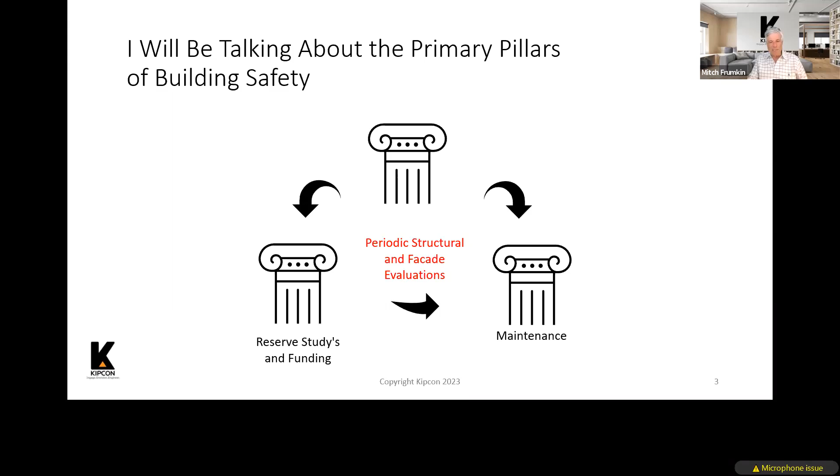But let me first give a little background. What is a building structure? Very simply, a building structure is what holds up the building. It's made up of the foundation, the columns, the beams—essentially what holds up the building.

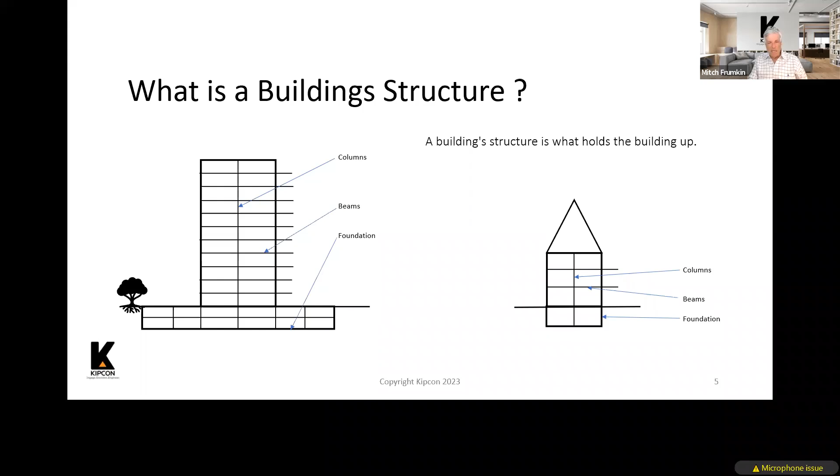Now, the next slide references the building's primary load-bearing system, with an asterisk next to it. I'm putting that there because these are the words used in the legislation, which I'll show you in a few minutes, to define what the inspections are done of.

It's the assemblage of structural components within a building that, by contiguous interconnection, form a path by which external and internal forces applied to the building are delivered to the foundation.

To put that more in layman's terms, since I think we have a number of attorneys here, and this is for legal CEUs—I think you can see my pointer on the screen, I've got a couple arrows here.

There's the weight of the building at the top, vertically—the dead and live load, which is the weight of the building. The live load, per code definitions, is the weight of the people, furniture, and similar things inside the building. Another live load they may consider is snow on the roof—like right now, it's snowing outside my window in New Jersey. So these are vertical loads on the building. There are others, but these are the primary ones.

Horizontal loads are generally wind loads. For example, a wind load may be 100 miles an hour, which equates to 30 pounds per square foot. I don't want to go into too much engineering, but there are horizontal loads such as wind and seismic, which is earthquake.

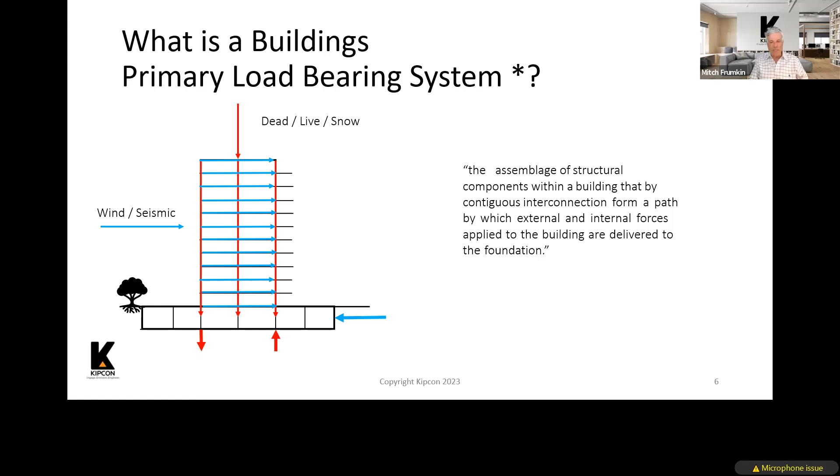So what you've got is the beams and columns—the beams shown in blue, the columns shown in red—and the primary load-bearing system is what takes these forces and delivers them to the foundation at the bottom. I wanted to show you this because when we get into the legislation, this is the definition of what is inspected as part of the inspections.

So what is the building's facade? There's a number of slides I've added here because we're talking about facades also. A facade is the exterior sides of the building, the exterior walls and the things attached to it. You'll see in a minute why we're starting to talk about this more and more, because things like balconies are part of the facade.

They're called appurtenances, and I'll show you what happened in New Jersey with a balcony just a few weeks ago. What we're talking about is an evolution—we started, and I'll show you how things are changing. I think we're getting pretty much to the end of what should be included and how it should be presented. But that's why I've included a facade.

The purpose of the facade, other than to look good, is to prevent air or water from entering the interior spaces. So the facade keeps you dry and keeps the wind from blowing in, hopefully.

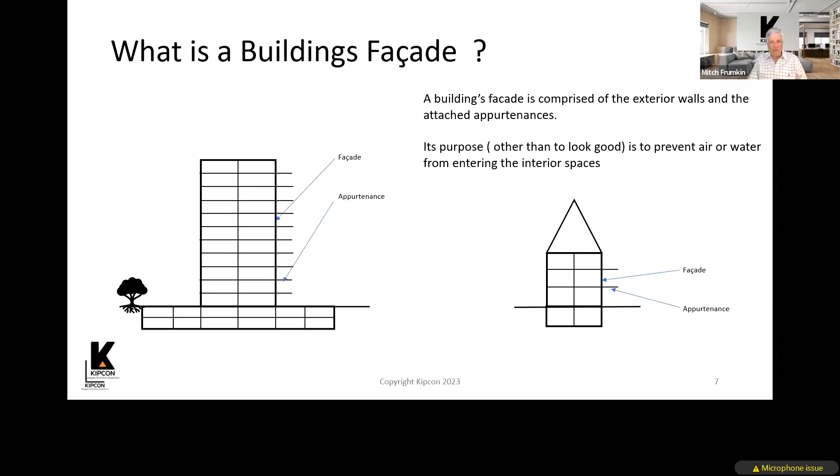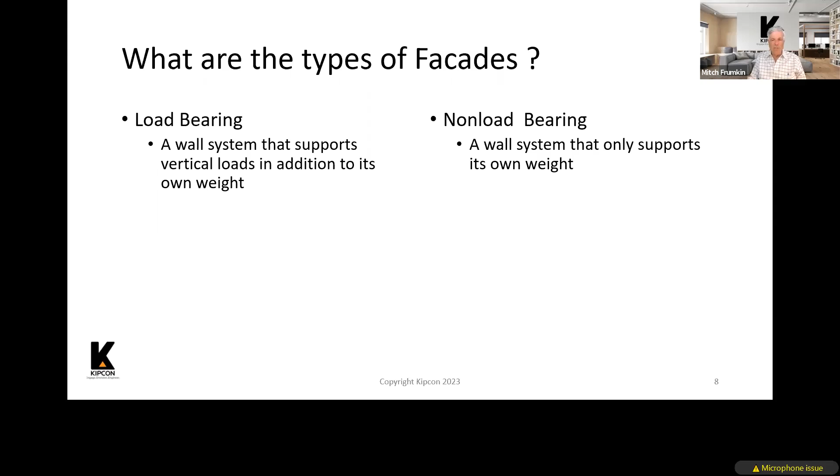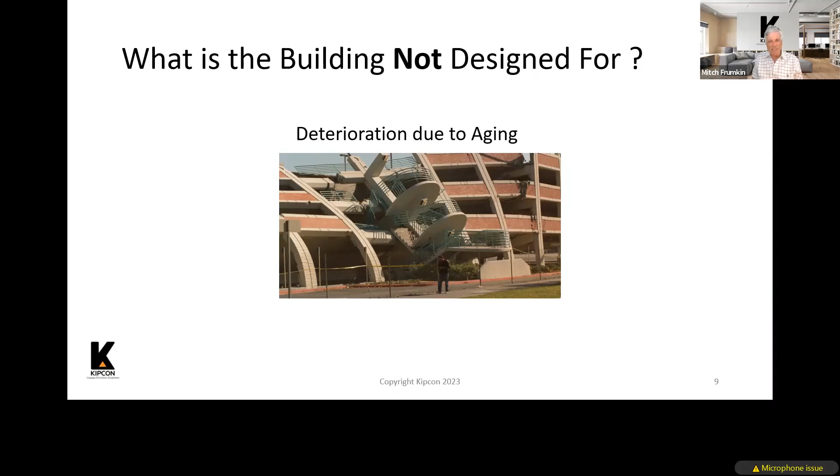So what is the building not designed for? It's deterioration due to aging. As buildings get older, they deteriorate. What we're talking about in all these things is not based on a building being built wrong—it's based on a building aging and us not taking care of it, which creates problems. So what is it not designed for? A couple of things have gotten us to where we are, which you're all aware of.

The Surfside tragedy in Florida, in which the building collapsed. That's the building, I don't have to go into detail, you all know about it I'm sure. But although this has been a terrible tragedy, one of the good things that comes out of tragedy sometimes, and this is one of those cases, is that there's a lot of things going on across the country to make sure this type of thing doesn't happen again, such as the legislation in New Jersey.

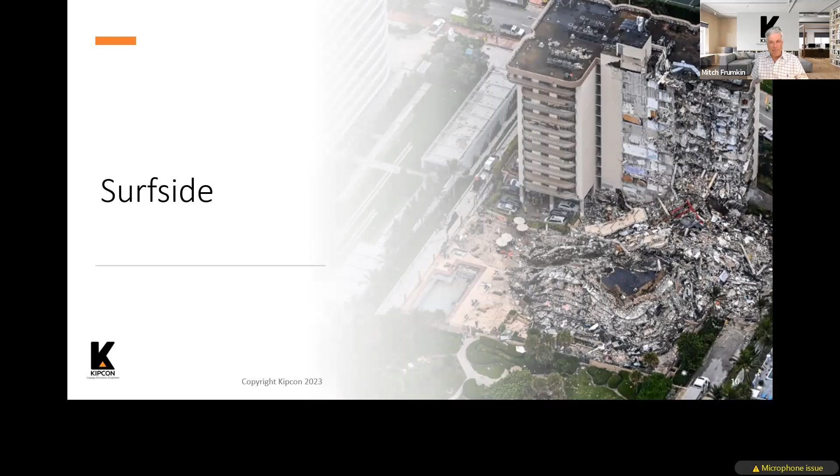So another critical thing is why facades are becoming even more of a focus than they were before. So now, as a result of the tragedy of the Champlain Towers in Surfside, CAI came out with a public policy report on condominium safety.

I was one of the co-chairs in developing this. Ed was on the National Task Force to develop this public policy. And in this public policy report, which if anybody wants a copy I can send it to you, or it's at the CAI National's website where you can download it for nothing, it deals with reserve studies and funding, critical thing, maintenance and structural integrity.

Keep in mind that I've added a note at the bottom here which says not facades - they're not included in the public policy. This was based primarily on a structural collapse of Surfside. But I can promise you on a national basis, CAI right now is investigating modifications to this public policy to start adding additional things such as the facade. We could also touch on, and maybe Ed will mention it, that just recently there's been made some suggestions to the pending legislation in New Jersey so that we do include balconies.

So just a couple other things, what others do. For example, in Ontario, Canada, and Singapore, they have very specific guidelines in terms of structural integrity and safety inspections of buildings. These have been in place for a number of years. Singapore's is very, very detailed, so is Ontario's.

A little note that the requirement in Ontario, Canada for doing structural inspections is based on a collapse that took place, I think it was about 20 years ago. And because of that, they have legislation for structural integrity inspections similar to the direction we're going in. Singapore has been in place for a number of years also.

We also had the opportunity to look at other places around the world. It's kind of interesting to note, which I always do, that there are other countries around the world that have structural integrity inspection requirements. But the United States, other than the 2 counties in Florida where we had the collapse, do not have any structural integrity inspection requirements. And I think we'd all agree that the one in Florida was a little inadequate based on when the first inspection was to take place.

In regards to facades, there are about 13, 14, 15 cities around the country that have facade requirements where facades need to be inspected on a regular basis. These are some of the cities you'll see as part of the presentation, that in New Jersey, Cliffside Park and Jersey City have added facade inspection regulations in the last year, at the most. I think Cliffside Park may have been in the last couple of months.

But I always make the joke, which I guess is not really a joke, that there's facade inspection requirements across the country to make sure that people walking by buildings don't have anything fall on them to kill them. But we don't have any requirements across the country until now to do structural inspections to make sure buildings people live in don't collapse. But there are a lot of facade inspection requirements across the country.

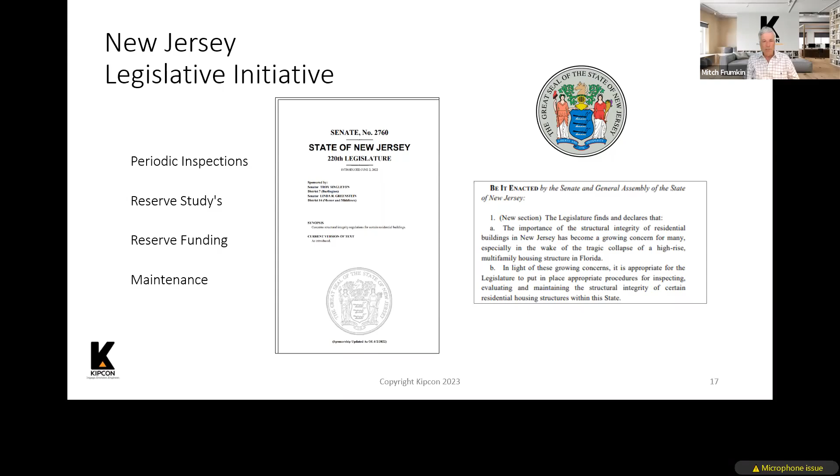So let's get back to the presentation. As Ed mentioned, the New Jersey legislation that's pending includes periodic inspections, reserve studies, reserve funding, and maintenance. It says the importance of structural integrity of residential buildings in New Jersey has become a growing concern for many, especially in the wake of the tragic collapse of a high-rise multifamily housing structure in Florida. That's the basis for where we're going and what's going on.

So the first thing is, what is a covered building? What buildings are included in this legislation? These words, where I have parentheses, come directly from the legislation. A covered building means a residential building categorized as use group R1 or R2, essentially multifamily residential, having load-bearing concrete, masonry, steel, hybrid structure, including but not limited to heavy timber, and a building with podium decks. The thing to take away is that covered buildings are not based on height—it's based on the materials the building is made out of.

A number of times you read articles about what happened in Florida, and it talks about high-rise buildings, so people categorize them as high-rise, but that's not the case. If you look at all the standards I mentioned, they talk about deterioration of structures based on the type of material, not the height of the building, which we'll get into when I show you some other legislation from other towns.

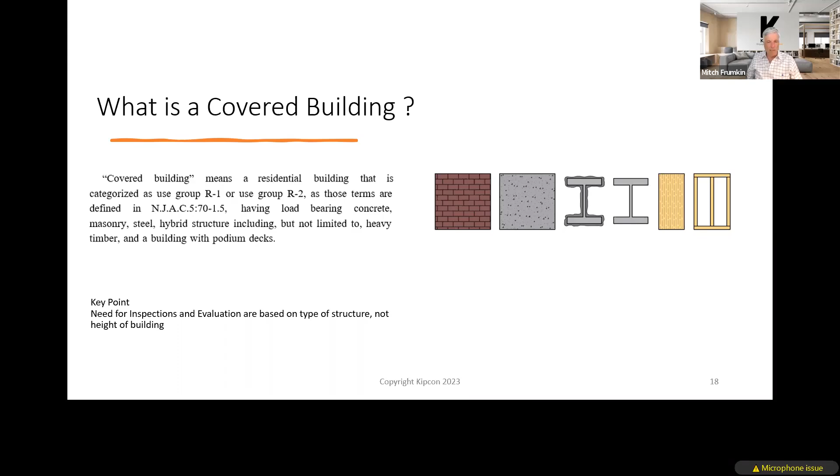The other thing I have to mention is that people perceive more rapid deterioration of a building if it's closer to the ocean. The Florida legislation had different requirements for periodic inspection timing based on how close the building is to the ocean. There's no question that water causes deterioration, and that salt water may make it happen more quickly, and there's salt in the water around the ocean. But there's also salt in the water of a parking garage that is not near the ocean. There's an article that just came out that in Florida, there's a move underfoot to change the current legislation so it doesn't differentiate timeframes based on closeness to water, because the scientific facts have proven it's not a geographic problem—it happens everywhere there's rain. I just wanted to mention that because I don't think it's in the presentation.

Planning for building safety starts when the building is being built.

Proper construction and planning is important for future building safety.

I'm going into the weeds here, but I'm showing you the specific words from the pending legislation. If the construction inspector determines that the primary load-bearing system is not in conformance with the building plans, meaning the primary structural system does not match exactly the design drawings, that may be okay, but before a certificate of occupancy is issued, an engineer must write a report confirming that the way it was built is structurally equivalent to the way it was designed. Planning for building safety starts when the building is being built. So if it's built differently, it doesn't mean it's built wrong, but there has to be a confirmation report from an engineer before the CO will be issued.

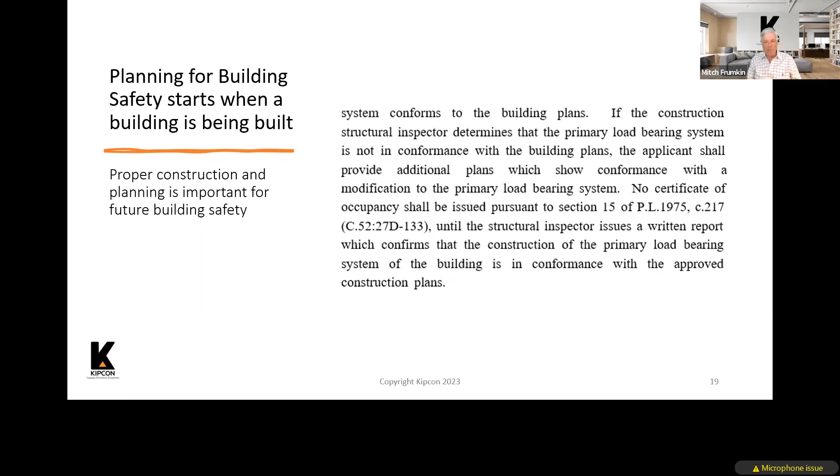Next, when does the first inspection take place? After the bill is passed, as it's written now, it would be within 15 years after the building is constructed. I'll touch on the reasoning in a minute, but basically the new legislation will include requirements for maintenance of the building, while in the past it did not. So the argument is that if it's being maintained properly based on certain requirements, the first inspection doesn't need to take place as quickly, so it would be 15 years.

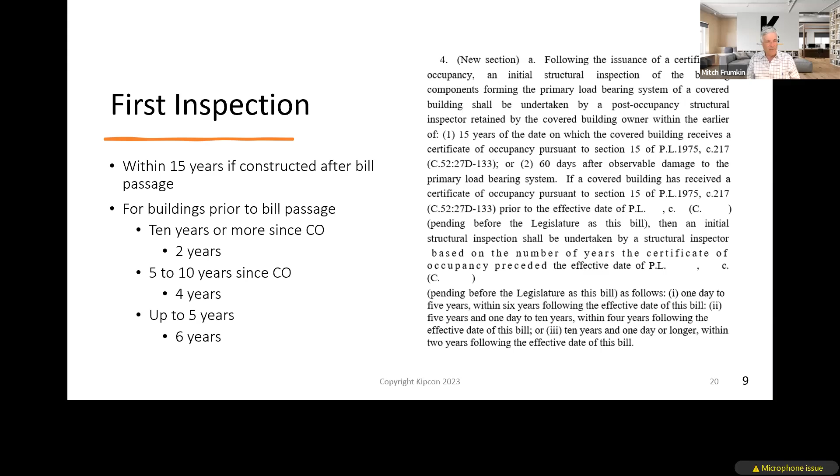The first report will include a condition assessment of the primary load-bearing system, any required maintenance or repair necessary based on the inspection, and a description of the work needed. It will also include when the next inspection is required, but that can't be any longer than 10 years from the date of the first report, or within 60 days if there's observable damage. Keep in mind, if an inspection reveals something presenting an immediate structural issue, it has to be addressed immediately. But if damage is simply noted, it's 60 days for observable damage.

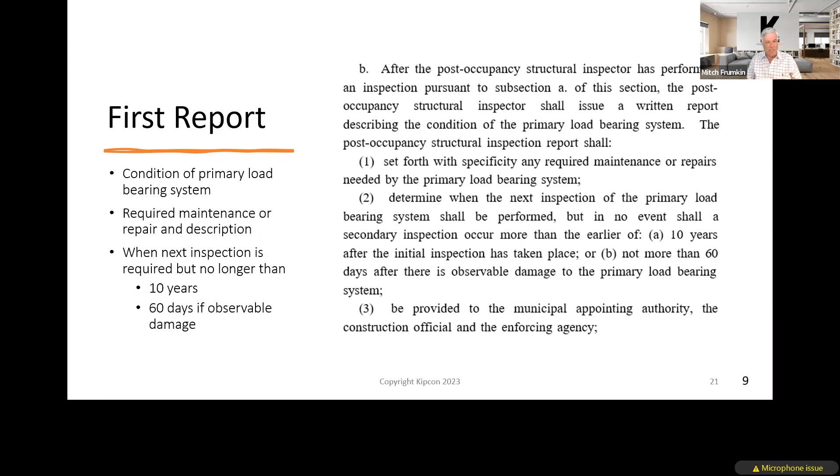Directly from the legislation: subsequent inspection reports after the first one must occur no later than 10 years after the prior inspection for buildings up to 20 years old. Once a building becomes 20 years old, it has to be inspected at a maximum of every 5 years. The reason for shorter time periods as buildings get older is progressive deterioration—as things age, deterioration happens more rapidly, which is why it's less than 20 years. The other thing to keep in mind is it says 'no later than.' That's because the report should specify when the next inspection has to be done, but these are maximum time periods.

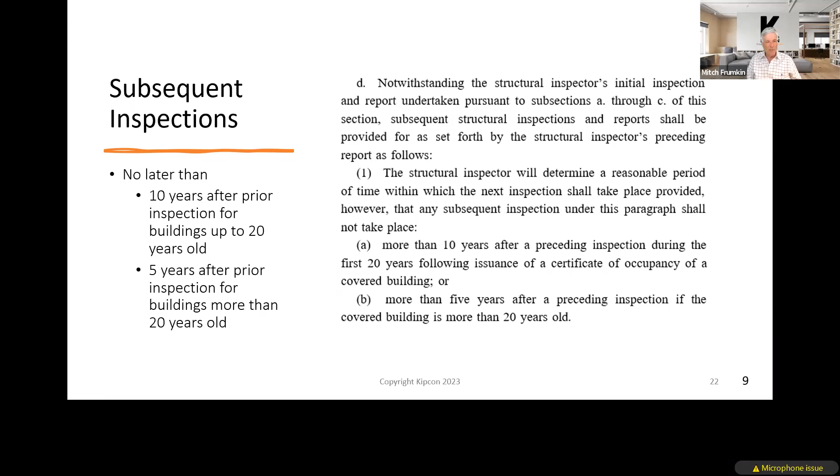So if you go into a building and say, based on the conditions we see here, it should be inspected in 4 years, the 10 years is the maximum, but it's governed by what it says in the inspection report. So those are subsequent inspections.

Who does these inspections? It's a professional engineer. The specific wording says that the structural inspector means an engineer licensed by the state who has the same qualifications required of an engineer under contract with the enforcing agency. Essentially what it's saying, in engineering terms not legislative terms, is that structural inspections need to be done under the purview of a licensed professional engineer with structural engineering experience.

I'll put a little asterisk in there. Keep in mind that there are plenty of licensed structural engineers who know how to design a new building. I'm not aware of any classes taught in engineering schools about how to inspect an existing building. So there are certain specialties in inspecting existing buildings, and just because a person is a PE doesn't necessarily mean they have the experience or qualifications to inspect an existing building. So I'll put a little asterisk on that.

What are some of the local laws in place? Let me stop for a second - that's the New Jersey legislation overview in terms of structural inspections. I'm going to move on to some local requirements already in place. Does anybody have any questions about the state legislative side? Let me stop sharing for a second. Does anybody have any questions about what's going on with the state legislation?

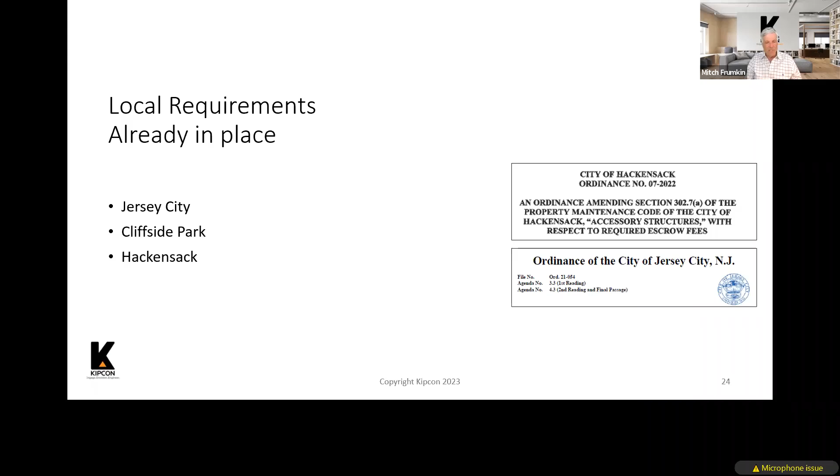Jersey City, New Jersey. There are two specific requirements in place: one for structure, which is every 10 years. Let me read you what it says. It's the structural inspection requirements: in order to maintain a building's structural integrity, the following requirements shall apply to all existing buildings or buildings constructed hereafter which are concrete buildings more than 6 stories in height.

Now, this has been out for a little while, and as soon as I read this - I hope nobody from Jersey City is listening on this call - but this is limiting structural inspections to only concrete buildings that are more than 6 stories in height.

Now, as soon as I see that, I say, first of all, now you're basing it on material, you're not basing it on height. And what happens if you have a reinforced concrete building that's 5 stories in height and has a structural problem? Well, what happens if you have a structural steel building that's 10 stories in height that has a structural problem? But this is what Jersey City says for structural - it's very specific: concrete, more than 6 stories in height.

In this case, the visual inspection will be conducted every 10 years by a licensed architect or engineer. So an architect or engineer - keep in mind, I'm a licensed structural engineer, and I'm sure there are some architects qualified to look at structures, but architects by nature are not trained to do structural designs - but they've included architects in there.

The inspection must include, but not be limited to - there's a little difference here - the inspection of foundation, balconies. So they've included the balconies as part of the structure, not as part of the facade, which is good, clearly, because it's included. All structural members and waterproofing - they've included in the structural part looking at waterproofing, which from a logical perspective you may think should be part of the facade, not part of the structure.

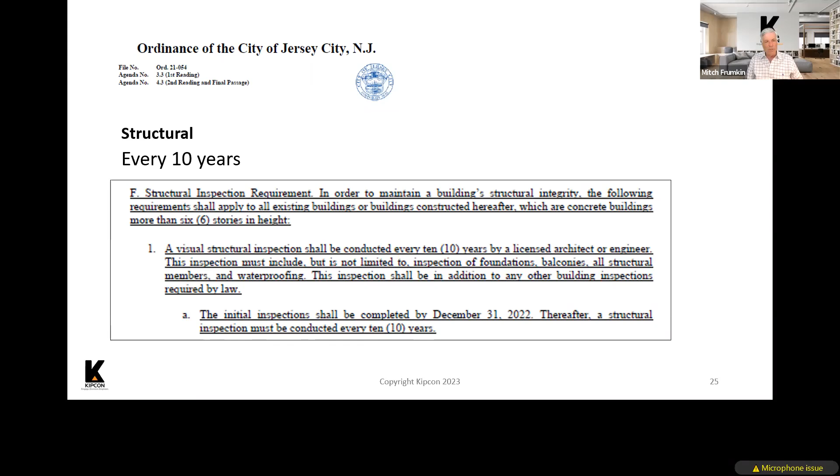So this is what it says in Jersey City for the structure. The Jersey City statute or ordinance also refers to a checklist. Now, this is what the checklist looks like for the structure. It says you have to have a description of the structure, nature of environmental and loading conditions.

Is there draining? Do the flashing joints, weep holes, and everything work as part of the structural inspection? What are the loading conditions? Is it dead load, live load, all kinds of things?

So they've developed a punch list, which is 3 pages. It gets into distress indicators, soils, foundation conditions, overall apparent alignment of structures. So they have a very specific checklist that you're supposed to use as a minimum for doing an inspection for the structure in Jersey City.

Keep in mind, it has things like staining, efflorescence, exposed reinforcement, and corrosion. So there's a lot of things in here that specifically pertain to the structure. And there's a number of things that go over and above what the structure of the building is, although if they're not done right, they may cause consequential damage to the structure, such as waterproofing.

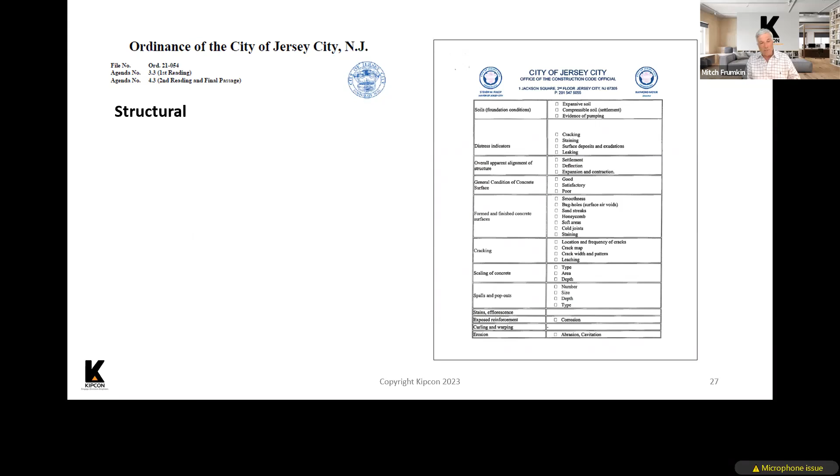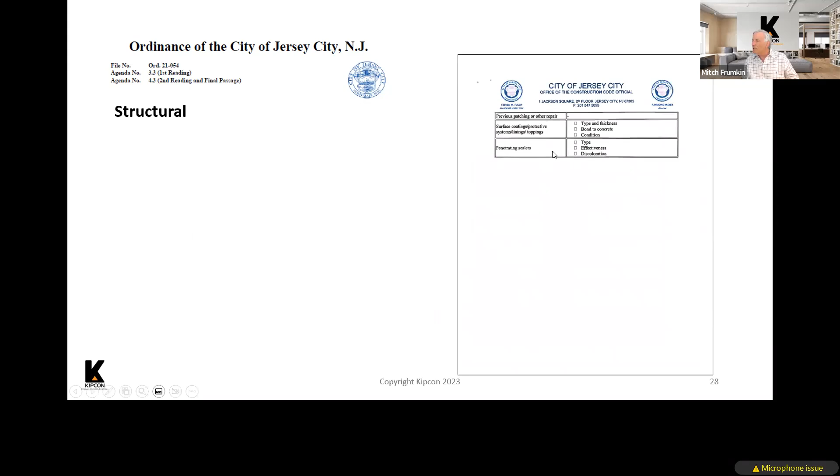Now, this is the 3rd page. It says surface coatings, types and thickness, all kinds of things, penetrating sealer. Now, keep in mind, this is the structure.

Now, let's go on to Jersey City for the facade. What it says is, in order to maintain a building's facade in safe condition, the following requirements shall apply to all existing buildings which are more than 6 stories in height, or consist of a masonry facade and are 4 stories or more in height.

Now, the difference is, they're absolutely right. When you do an inspection of facade, generally the facade requirements are based on the height of the building, not based on the material of construction. So they're basing it on 6 stories in height, or if it's masonry, 4 stories in height.

The facade inspection, which is not unusual if you look across the country, is much more frequent than the structural inspection, conducted every 5 years, again by a licensed architect engineer, and it must include an inspection of all exterior wall and appurtenances. That's a word a lot of people use, which is anything attached to it. In many cases, the appurtenance term deals with a balcony on a facade.

But in Jersey City, they've included the balconies as part of the structure. Keep in mind also that they don't use the term primary load-bearing system, they just say structure. So a balcony is a structure, but it only supports itself. And that's the difference between a primary load-bearing system, because if the balcony collapses, the building isn't going to fall, but it is a structural element.

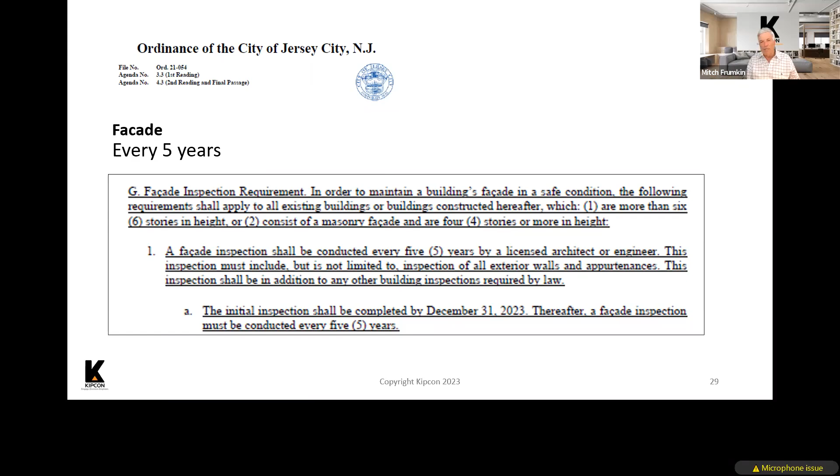This inspection will be in addition to any other inspections, and also the initial inspection by December 31st, 2023, thereafter every 5 years. Just like with the structure, Jersey City has a checklist. And here's the checklist: facade description, general conditions.

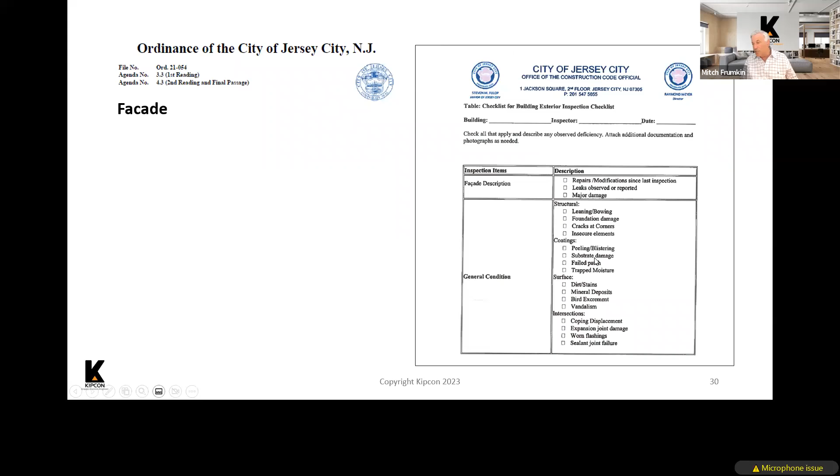There's actually some overlap between some of the things in the facade inspection requirements and the structural inspection requirements. I haven't gone through and checked them right next to each other, but you can see here leaks, water infiltration, major damage, but there is a checklist. Coatings, it talks about coatings in the structural section also, but this is the checklist that they provide.

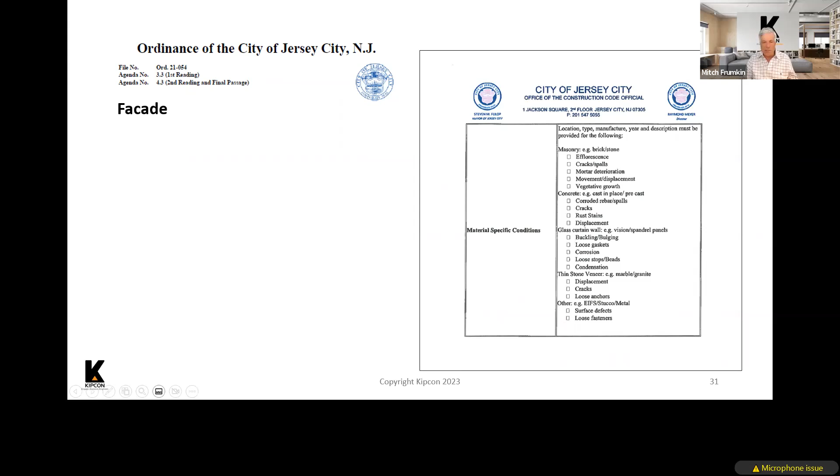And if I'm not mistaken, it does say in the wording that these are the minimum things you should look for. But this is a list: efflorescence, it's a material specific condition. So Jersey City is very specific. They have another checklist dealing with the facade. They also include windows and doors and all kinds of things.

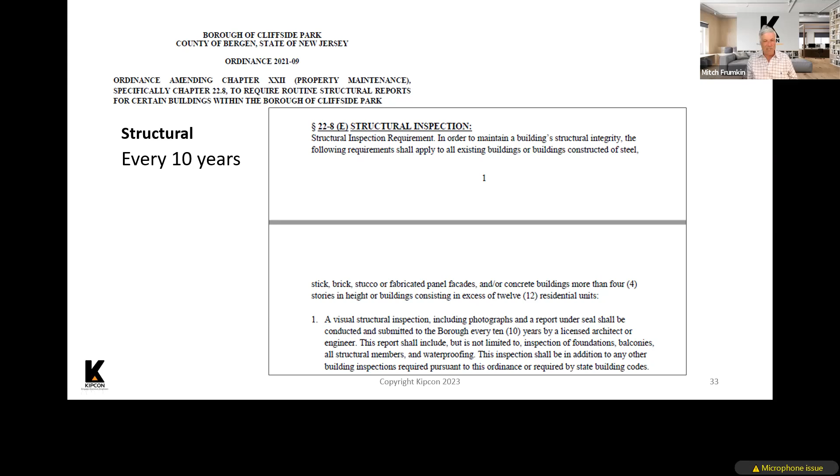But you can see that the wording on these things, first of all, Jersey City and Cliffside Park don't match in terms of the wording and things like that. But sometimes the wording is confusing even to read. So again, this is what Cliffside Park says.

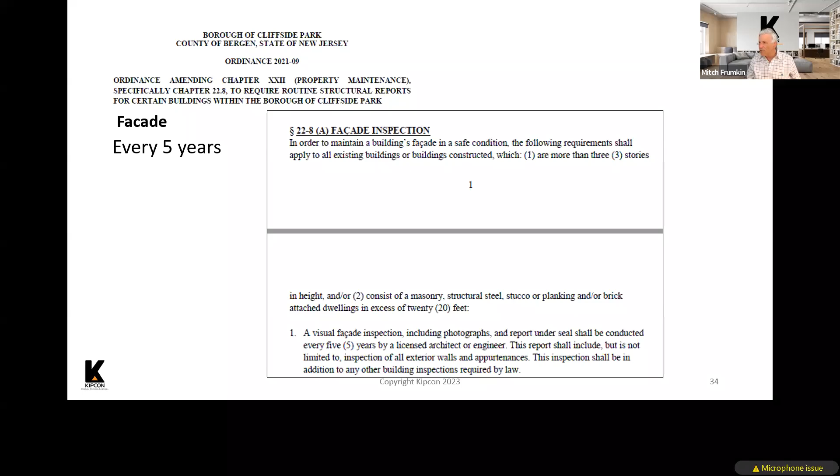Again, it refers to a punch list or checklist like they have in Jersey City, but they have not issued that checklist yet. And somewhere in here it says when the first one has to be done by, but I left it out, but I think it's within the next year.

Now let's go on to Hackensack. Hackensack requires parking garages to be inspected every 5 years. We're in the process of putting together parking garage inspection reports on probably 4 or 5 parking garages right now.

And not to throw it out as a danger zone, but parking garages are subjected to all kinds of environmental conditions. And not only that, with the cars driving in and out in the winter, they carry road salt, which there's no question creates deterioration pretty quickly because of all the salts in the water. Not by the ocean, but by the conditions it's exposed to, because they're exposed to the elements.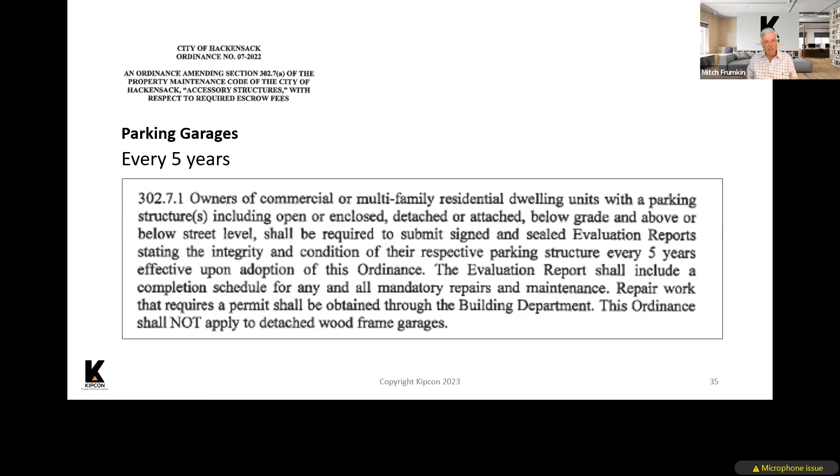Now this says every 5 years. In the reports we've done, even though it says every 5 years, based on the condition we have seen, we have made recommendations in most cases that the next inspection be done in less than 5 years based on conditions and the rate of deterioration. But this is what Hackensack has for parking garages.

Does anybody have any questions about any of the various towns or what they have as far as their ordinances? Because now I'm moving on for a couple minutes to the reserve requirements.

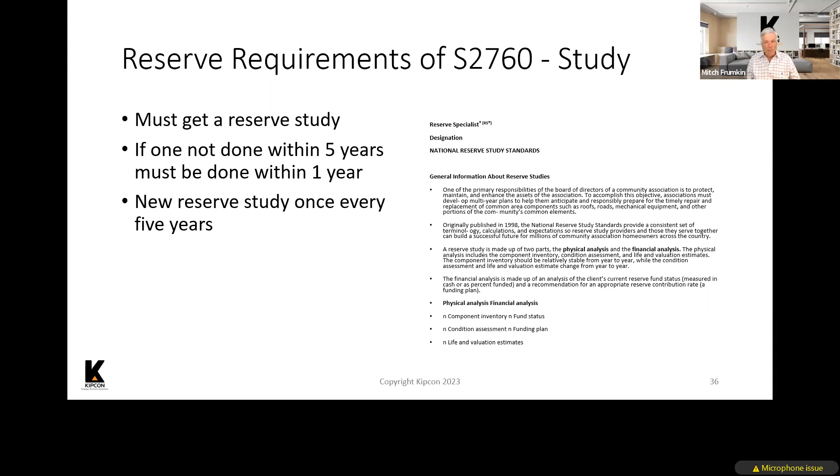Now the reserve requirements include having a 30-year funding plan. The board can pick the funding plan, but it not only says that a reserve study is required to be done, but also that it has to be funded in conformance with that reserve study.

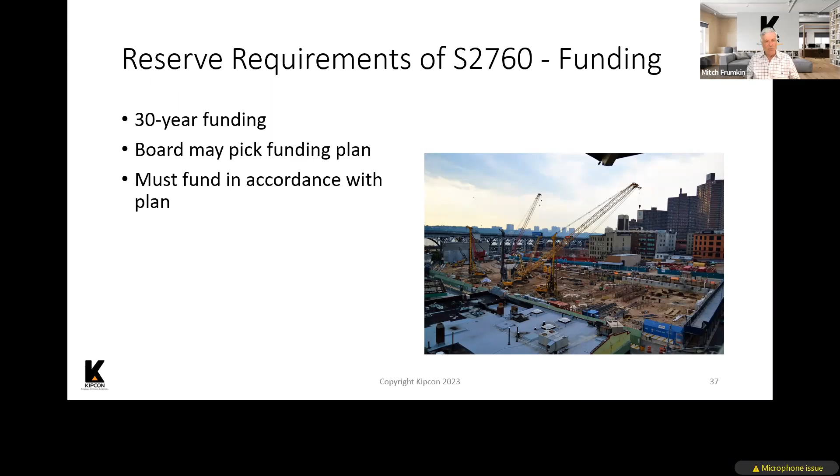It's kind of interesting that across this country there's a number of states that have legislation in place regarding reserves. Some states say they have to have a reserve study, but it doesn't say a word about funding. Other states say they have to fund a reserve, but they don't say anything about a reserve study. A lot of times it doesn't overlap. That's why both in CAI's national public policy as well as in this legislation, it's very clear that not only do you have to do a reserve study, but you have to fund it—the association must fund in conformance with the study.

Now it goes on, as Ed mentioned, let me talk about what the legislation means when it uses the word 'adequate' in a few different places.

What adequate means, essentially by definition, is that in the funding plan, if the association needs to get money from borrowing, from a special assessment, or any other place other than the reserve study, then it's not adequately funded. For those who know the National Reserve Study Standards, this is essentially saying that baseline funding is adequate funding, where you'll never run into a deficit.

I think I have these slides in here twice, but this talks about that if you're not adequately funded and it affects your overall operating budget, going up more than 10%, then you have 10 years to get back to adequate funding. If it affects the operating budget but doesn't go over 10%, then you have 2 years to catch up to adequate funding. I left these slides in at 6 o'clock in the morning when I was finishing this presentation, because I actually have the specific wording from the legislation further on. But as far as the concept, I got it right, I'm pretty sure.

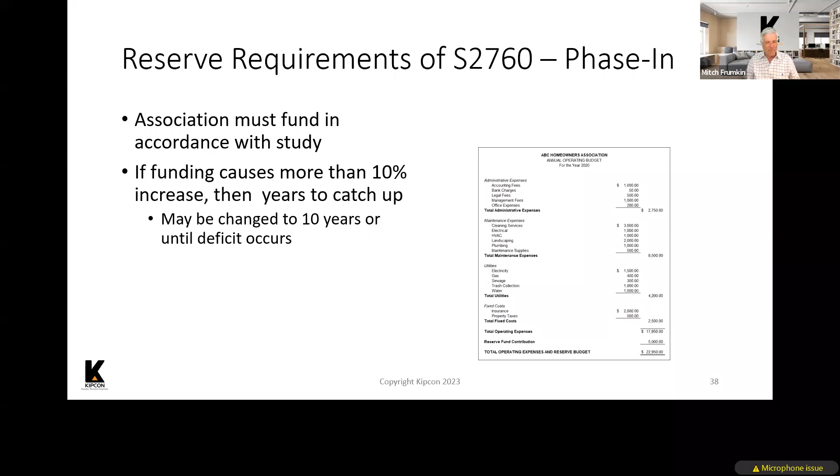Now let's talk about the structural evaluation. What's included? There are some standards. I'm just going to give some examples from existing reports. It has a table of contents with attachments, and a description of the structure. For example, in this case, it's from a building made out of reinforced concrete, so it explains what it is and how it works.

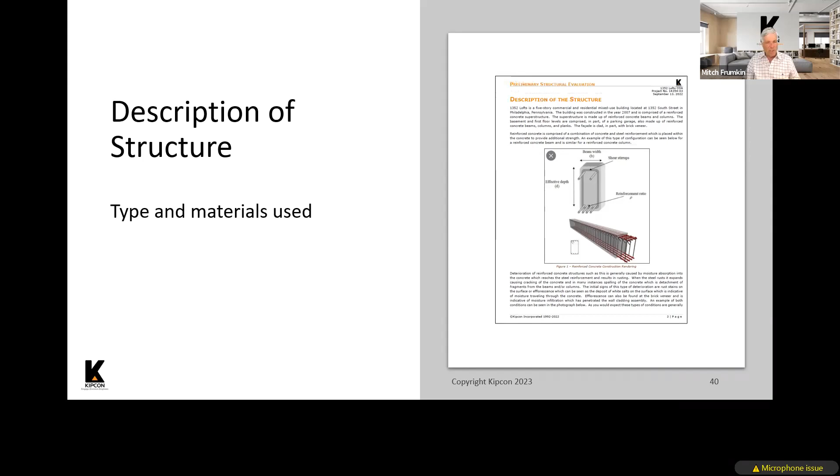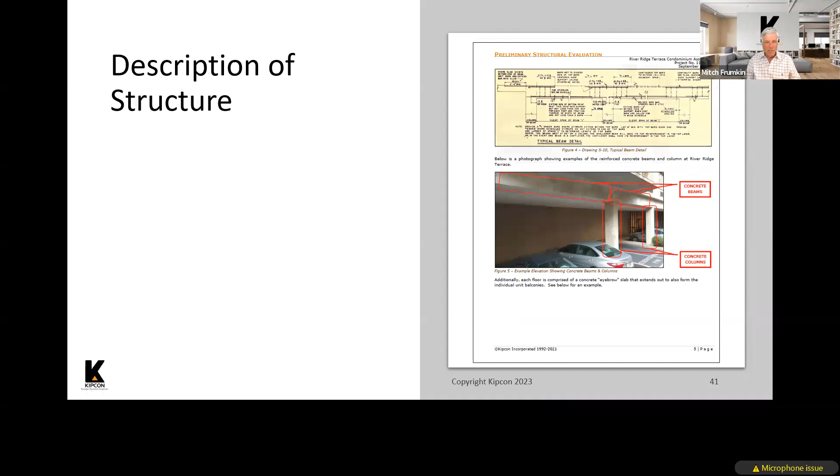It has a description of the structure. In this case, this is showing the beams and the columns. Up above, it's showing how it was supposed to be built based on the structural design drawings. It also has a description of the facade. In this case, it's showing they have concrete balconies and concrete eyebrows, which support the walls and balconies around the perimeter.

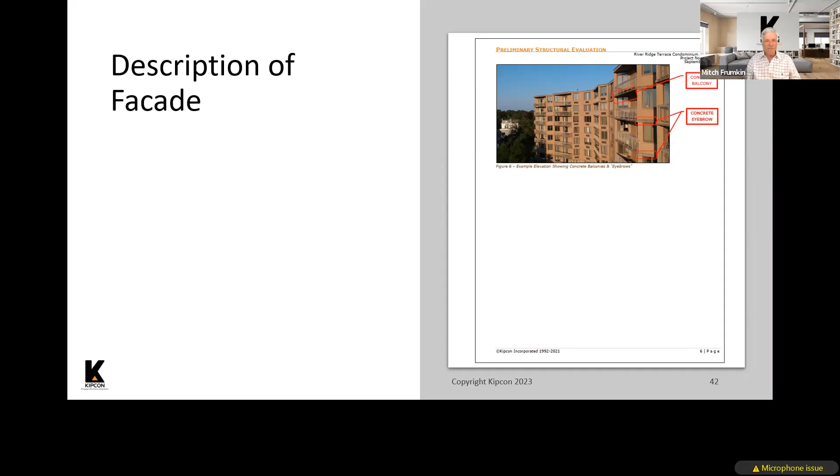Up until a couple of weeks ago, this presentation really just talked about the description of the structure, but because of what's going on with the facades, I've added some additional slides.

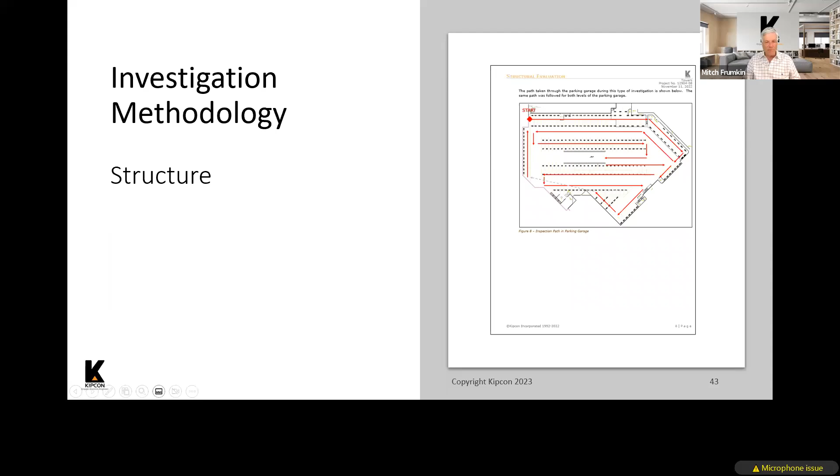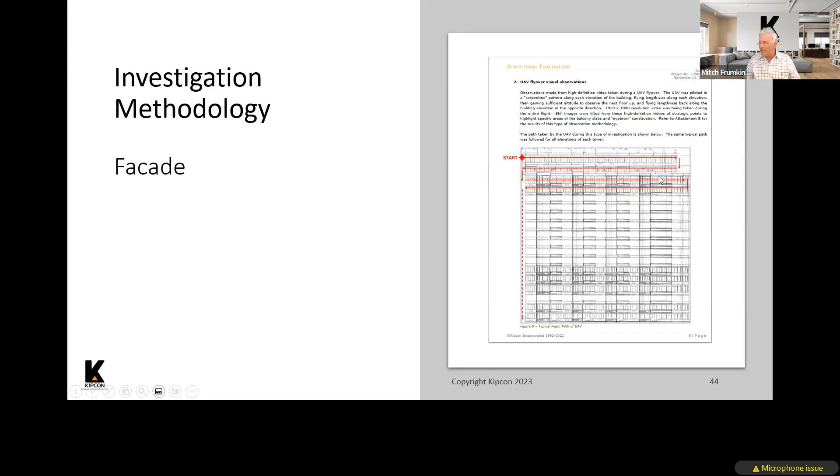It has the investigation methodology. For example, this is a parking garage structure where the red line shows how we walked through the methodology, taking pictures of conditions and identifying exactly where they were. This is a facade methodology where we started at the top of the building and used a drone, flying back and forth to document the facade.

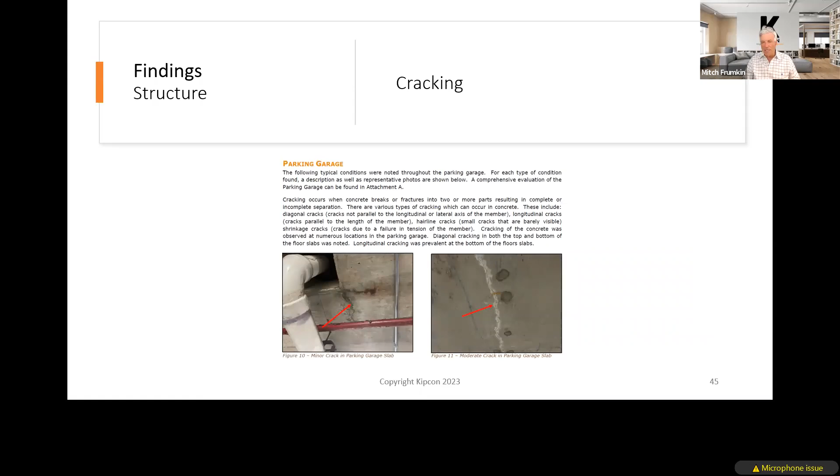Then here's some of the findings. Then we get into the structure. For example, we identify the location, in this case in the parking garage, and the condition. Here's another example of findings of the structures.

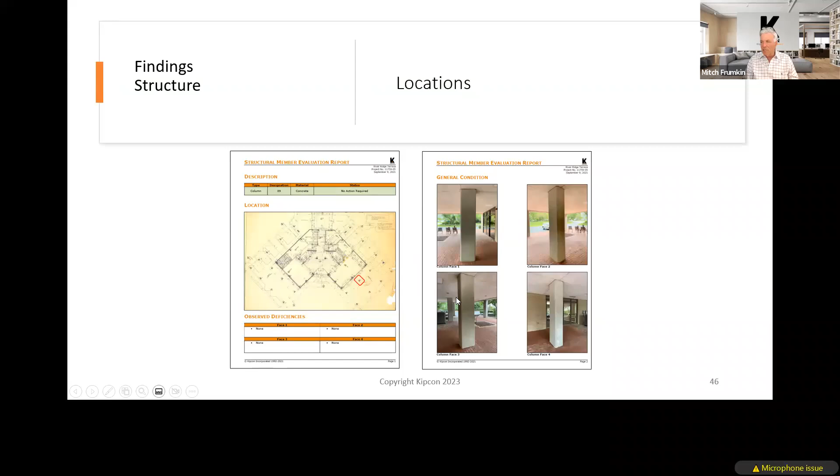So let's say you look at one of these columns and it looks great, but then you go back and look at it in 3 or 4 years, or whatever the time frame is, and you see cracking and problems, you'll know how rapidly the condition is progressing. This type of evaluation, sometimes called a baseline inspection, is an inspection you can measure certain future inspections against for a condition.

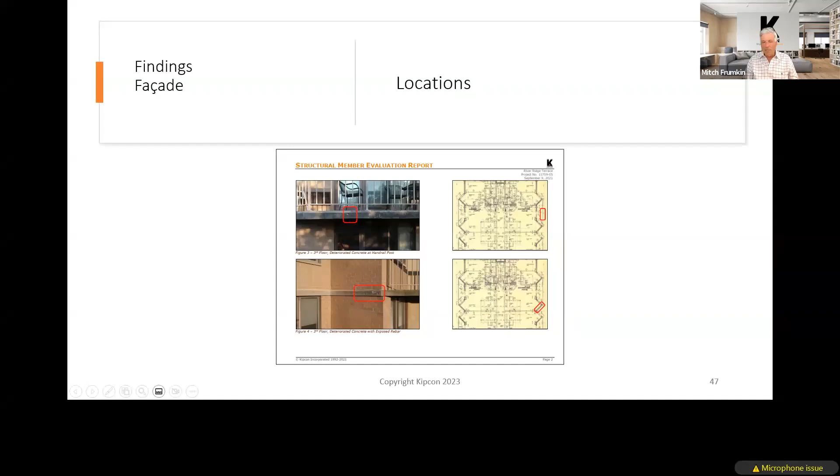Here's findings of facade. Now here you've got locations on the facade where there are problems, shown exactly on the plan where it is, and then we include a condition and what the condition is that we saw. Here's another one of facade, a similar type of thing.

Now, very, very important, and it's interesting to me at least, one of the things that's very important to keep in these reports is a condition description. What does it mean?

So if I put in a report that a condition is severe, moderate, or minor, what does it mean? You need a description of what it means. I'm involved right now in drafting legislation similar to this in Delaware, and I'm on the task force doing that. One of the things we're including is what definitions engineers have to use when doing their reports, so it's consistent.

In Philadelphia, they have facade inspection requirements, and inside those requirements it's very specific what rating system you have to use when doing your reports. Condition descriptions are very important. I've seen inspection reports done by others where they talk about conditions but don't really rate them against each other, with a description of severe, moderate, and minor.

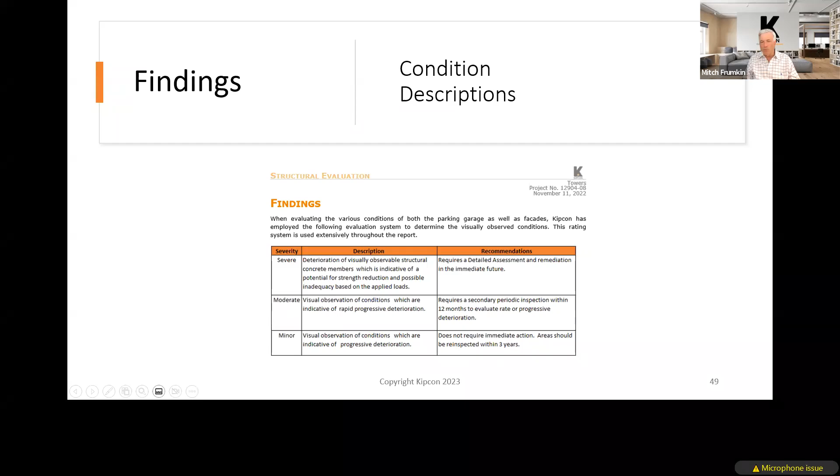There are different types of words, but the description may be the same. For example, severe means take care of it right away. Moderate requires a secondary periodic inspection within 12 months. Minor means within 3 years. So you need a rating system.

Here are some findings as examples. This condition we saw was minor, and here's a picture of some minor cracking. That's an example of what it looks like in the report.

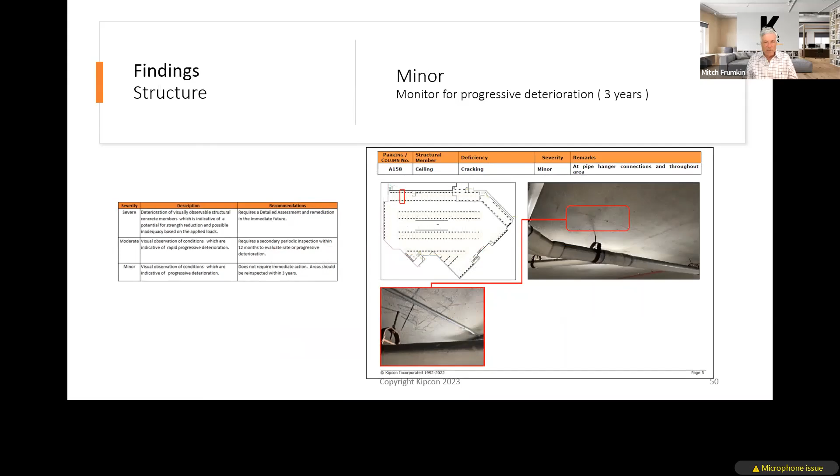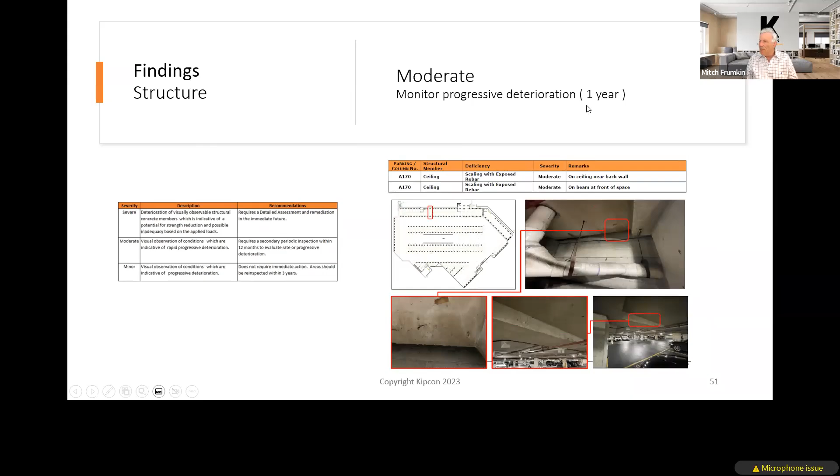Here's something that's moderate. We see scaling and exposed reinforcing steel. Here's the exact location, and this is considered monitor - you need to monitor and take a look at it again in a year from now.

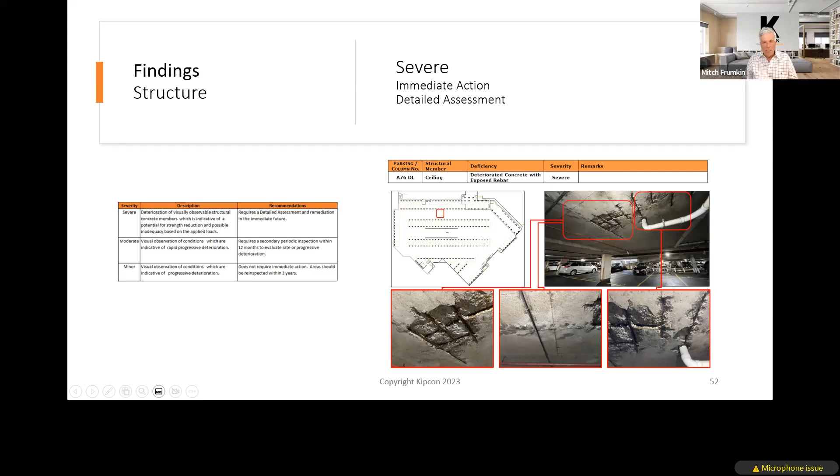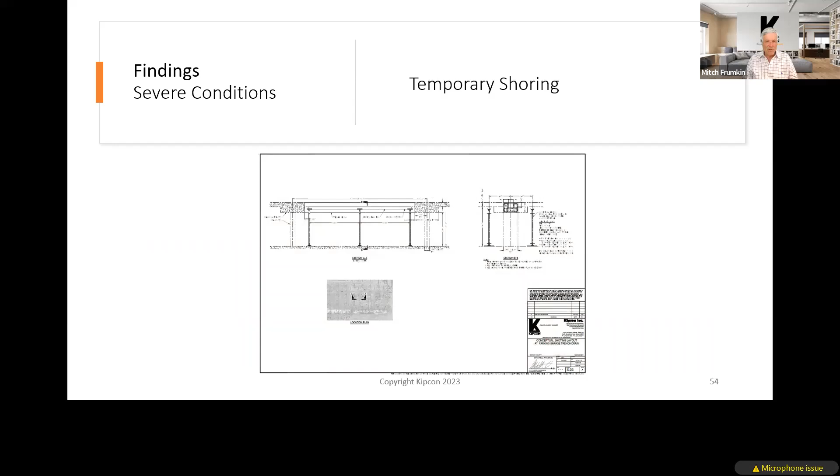In this case, this is a severe condition that needs to be taken care of right away. Here are some close-up pictures of a severe condition where it's not good. In this case, because it was immediate, they put together a plan instantly to put in temporary shoring, since there was a structural concern. Then a design was done to fix it right away. So you have to rate it.

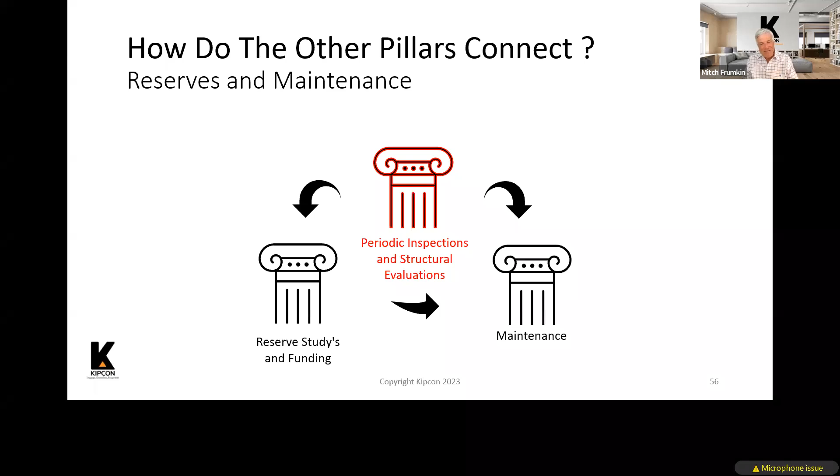Now here's some of the other pillars to connect. Like I said, I left those slides in by mistake, but this goes into a little more detail on the specific wording in the legislation regarding reserves.

It says any association shall undertake and fund a capital reserve study to assess the adequacy of the association's capital reserves to meet the anticipated cost of replacement or repair of the capital assets. It goes on to say a capital reserve study conducted pursuant to this section shall be prepared based on the National Reserve Study Standards of CAI, and should be performed or overseen by a reserve specialist credentialed through the Community Associations Institute, which Ed mentioned before, or an engineer or architect licensed by the state.

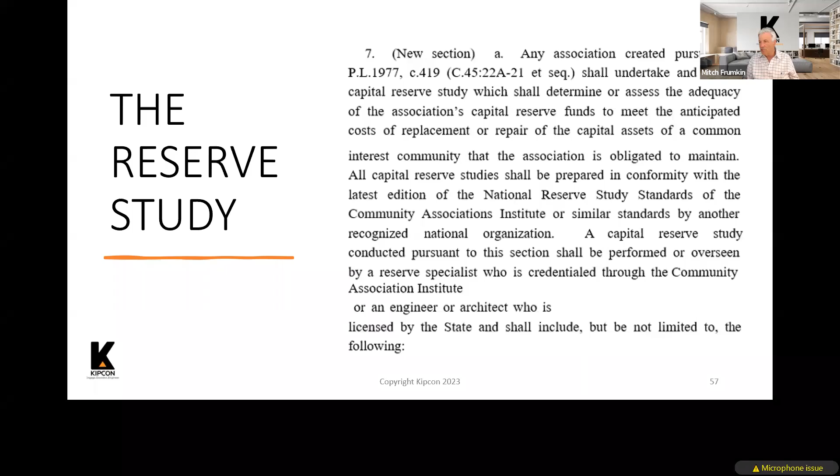Then the report should include the following - this is specifically written in there. By the way, the National Reserve Study Standards, Ed and I are on a national task force revising them right now, and they're 99% done. As part of tomorrow's presentation, if you're interested, I'll go into detail about what those changes are, because you should be interested. If you're a manager involved with reserves, it's going to make some changes.

As mentioned before, associations who have not undertaken a reserve study within 5 years of the effective date of this legislation shall undertake a reserve study within 1 year of the effective date. And if it's a new association with a new board of trustees, they shall undertake a reserve study as soon as practical after the election of the majority of an executive board, but no more than 2 years following that election. That's for new communities going through turnover or transition.

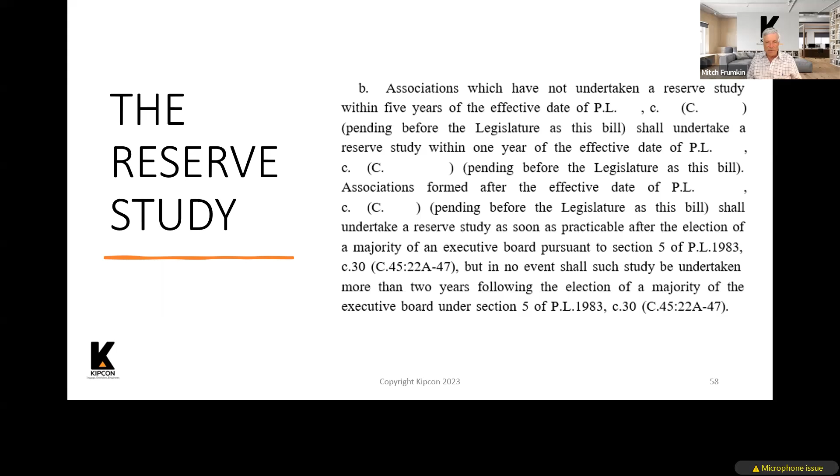Now, if the association does not have an adequate reserve fund as I defined for you a few minutes ago, and there's more than a 10% increase in the previous year's common expenses, then you have one of two choices to get to adequate: 10 years, or the period of time until the next replacement that would put you in a deficit.

So if you have something that, according to the reserve study, needs to be replaced within 3 years, but you don't have the money to do it, the reserve fund has to be brought back up to adequacy by the time that component needs to be replaced. Very logical. If you don't do it, you're going to have a special assessment or borrowing or something anyway.

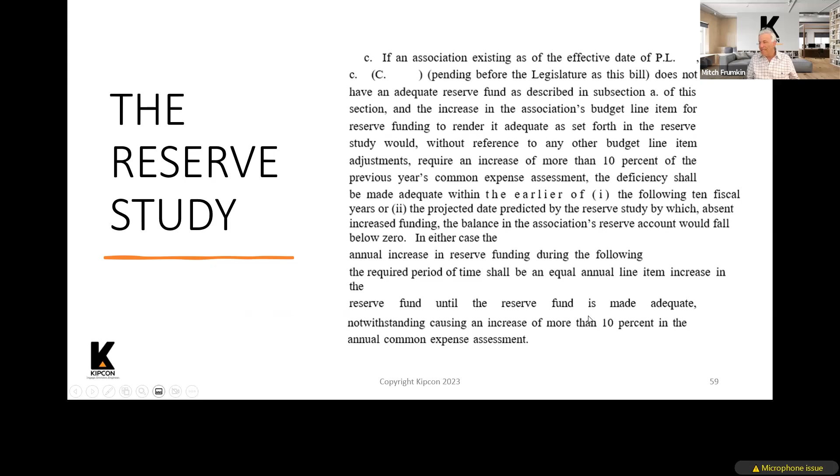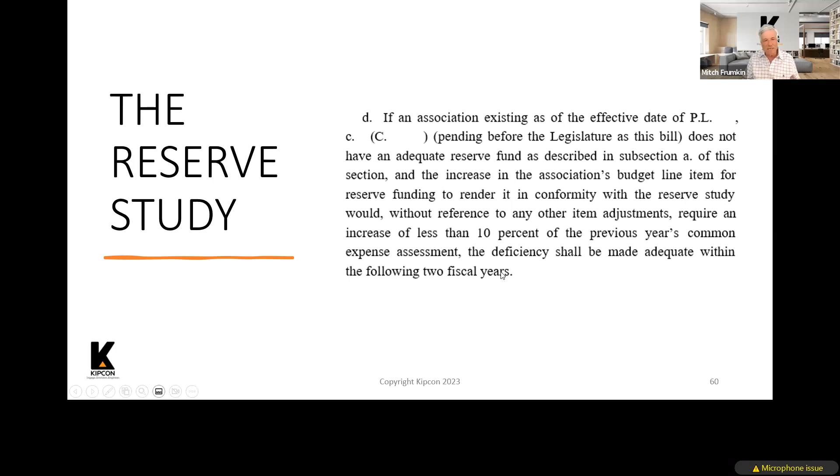So you need to bring it back up to adequacy within that period of time, or within 10 years. And if it's less than a 10% increase in the annual budget, then it's 2 fiscal years. So if it's less than 10% impact, you have 2 years to bring it back to adequacy.

Now, the initial budget. I mentioned before that the developer, when they create a community, has to include adequate reserves in their budget. The new requirement for developers, and this is why the first structural inspection for something after this legislation is passed will be 15 years, but for buildings before it, the time frame was 2 years, 3 years, up to 6 years. But the developer shall prepare a document, including the governing documents, which sets forth preventive maintenance tasks to be undertaken by the association over the life of the common area components.

The preventive maintenance document shall provide the maintenance schedule and timing for preventive maintenance, including but not limited to periodic inspections of the structural components or common areas of the association. So the initial budget ties into the type of covered buildings I talked about - the original budget is going to include the cost of doing the structural inspections when they're needed. And the developer should include in the budget all operating expenses associated with preventive maintenance set forth in that document.

And then it says the preventive maintenance document shall be updated at the completion of any structural inspections that are performed. So one of the things you're going to see is that if you do a periodic inspection and it says something needs to be fixed within 3 years, the person doing the reserve study should be reviewing that report and putting the cost of doing that repair into the reserve schedule.

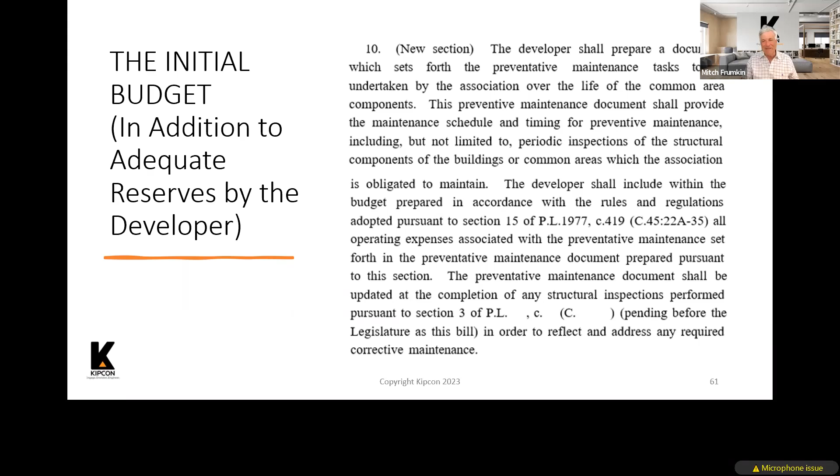All right, so now let's talk - I just want to give a couple of different definitions here so you can have them in the background and understand. Maintenance is the process of preserving something. Now, the reason I wanted to put this in here is because a lot of people consider all maintenance to be the same, and I just want to tell you there's essentially 3 different types of maintenance.

The first, I'm going to start from the bottom with deferred maintenance. Deferred maintenance means you're not doing anything - you're deferring maintenance and not doing it. One of the things that's interesting in our industry, including me, is that sometimes we confuse the term deferred maintenance with preventive maintenance. If you're doing deferred maintenance, it's wrong.

Preventive maintenance is the term we use, which is a proactive maintenance plan to do things so that components will exceed or meet their estimated useful life and keep them in good condition. Simply, if you have a reserve component with a 20-year life, you want to do preventive maintenance so it gets 20 years or more.

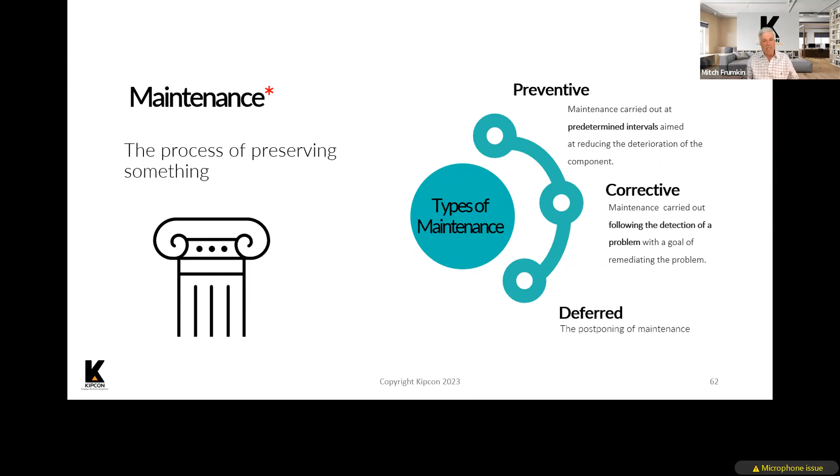Corrective maintenance is maintenance that's done when you look at something and there's a problem you didn't anticipate and you have to fix it. That's called corrective maintenance. As I mentioned before, in your reserve study, if the report says corrective maintenance or repair of something needs to be done, the cost and timing of that corrective maintenance should be added to the reserve study.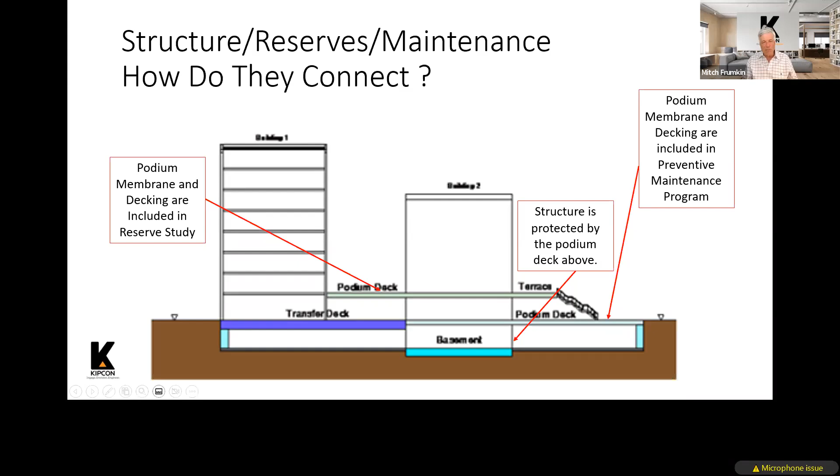There's a misconception that it's going to cost more to do what we're talking about. If you look at the life cycle of a building, preventive maintenance will cost you about 5% of the replacement cost spread over the life of the component. But if you don't do preventive maintenance and have to do corrective maintenance instead, it could cost you 30 times more than the total cost of preventive maintenance. So when people say this is going to cost them more money, that's not true—it's going to cost them less.

There's also concern that these reserve requirements are going to make people pay more and their fees will go up. There's a yes and no answer. If a developer sets up governing documents that include adequate reserves, and you fund those reserves the way the documents say, and update the reserve study regularly, you shouldn't ever have to have a special assessment.

What happens is communities after transition take over and decide, for whatever reason, not to update the reserve study or fund the reserves. Those are the associations that may run into trouble playing catch up to get to adequate reserves. But if associations fund the way the original governing documents say, there's much less chance of this happening. Once an association gets back to adequate and starts amortizing replacement costs over full useful life, it actually costs less than if you don't do these things.

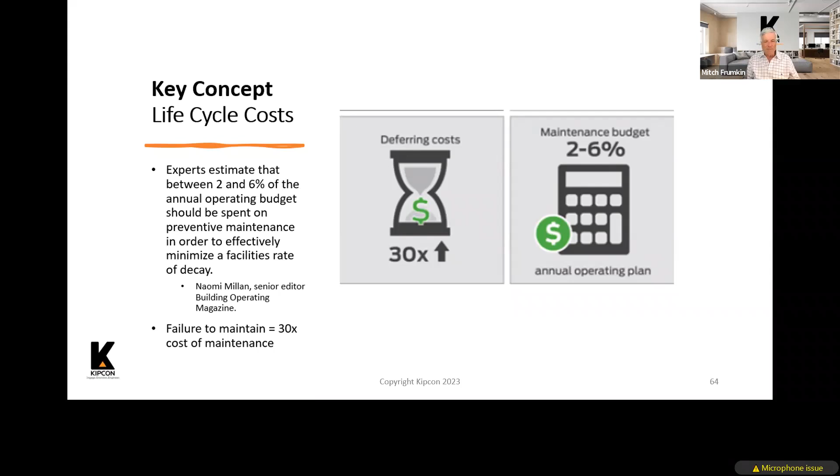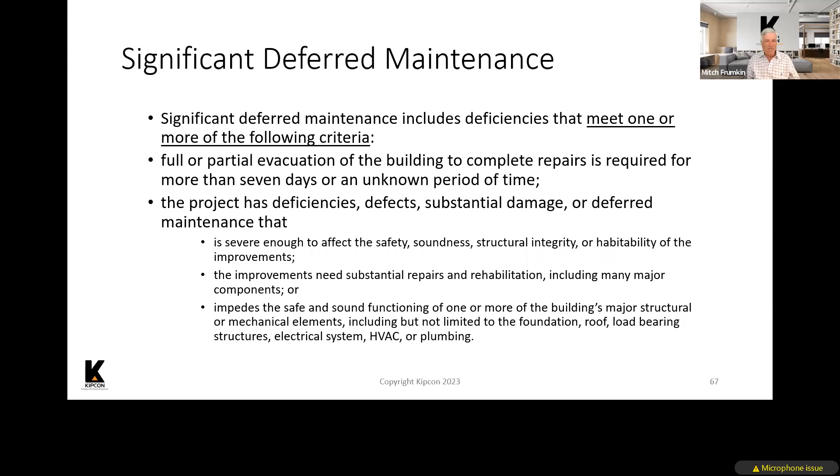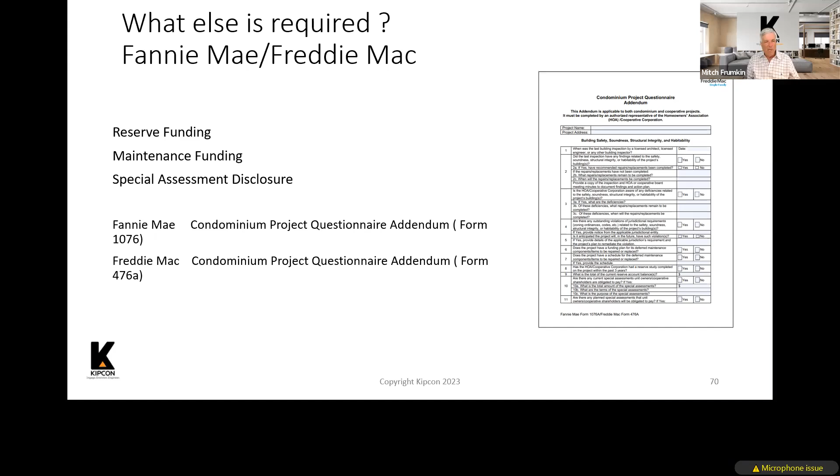I just have a couple seconds left—tune in tomorrow for more information. There's a number of things going on with Fannie Mae and Freddie Mac in regards to funding for refinances and buying new homes. They're tying their mortgages these days to the safety and structure of the community, so there's new mortgage lending regulations, including definitions of things like significant deferred maintenance. I'll touch on these more tomorrow in terms of banking requirements. You're probably all familiar with the new forms they've come out with, Fannie Mae 1076 and Freddie Mac 476A. We'll touch on that tomorrow.

Just so you know, there's some changes going on at Fannie and Freddie just a few weeks ago. As a matter of fact, they emailed me with a couple of questions the other day. I had the opportunity to meet with them and talk about different ways to update the standards so they work. So there's some things going on in the background. But the manager's or owner's role is: if you see something, do something.

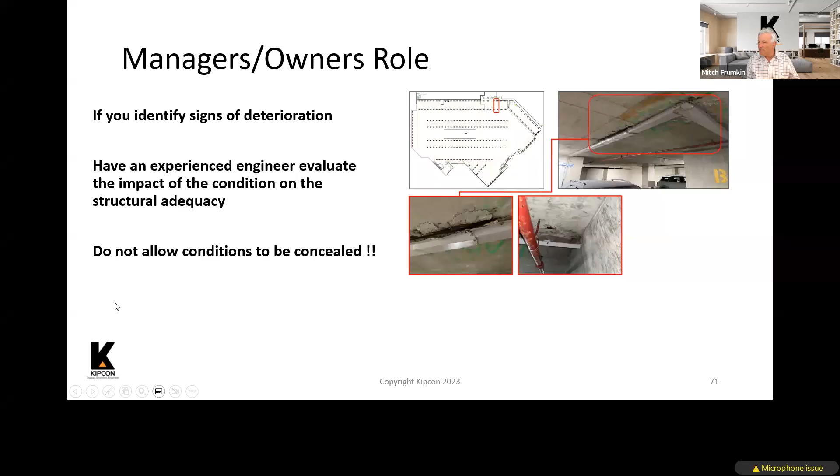For example, just a couple of pictures that show you what's not uncommon. These silver things are gutters and downspouts that have been put in their parking garage because people didn't want water to fall onto their cars. So who knows what's going on under the gutter. If you see things like this, the brown means there's rusting reinforcing steel, and the white means there's water coming through. So this is step one, white, and this is step two.

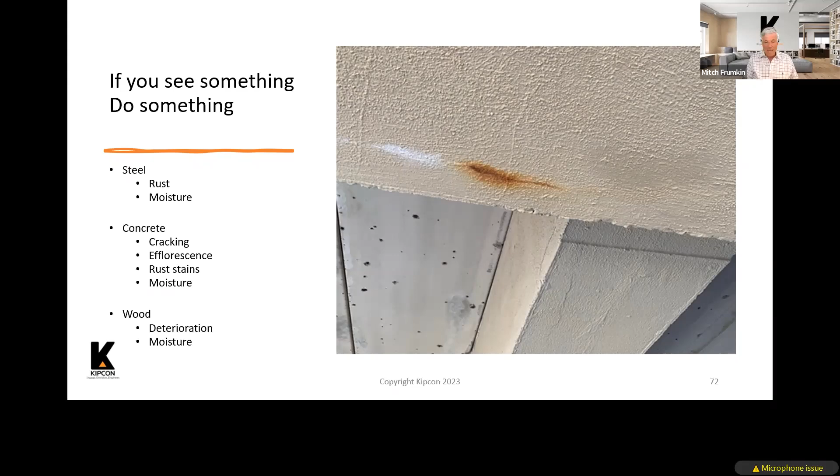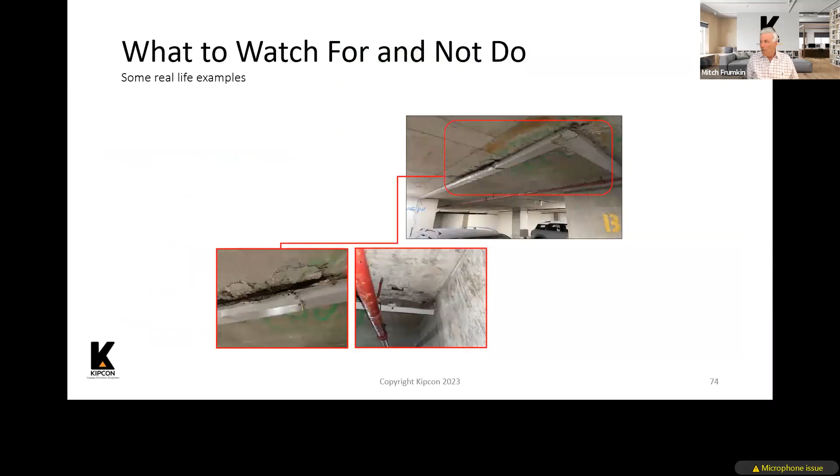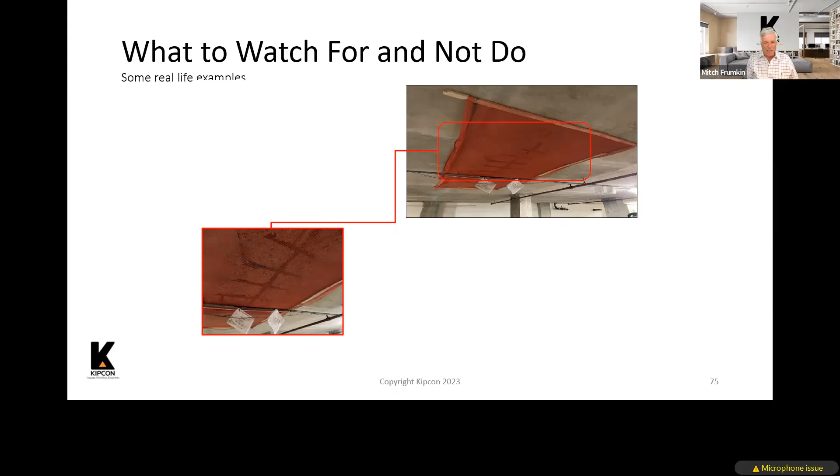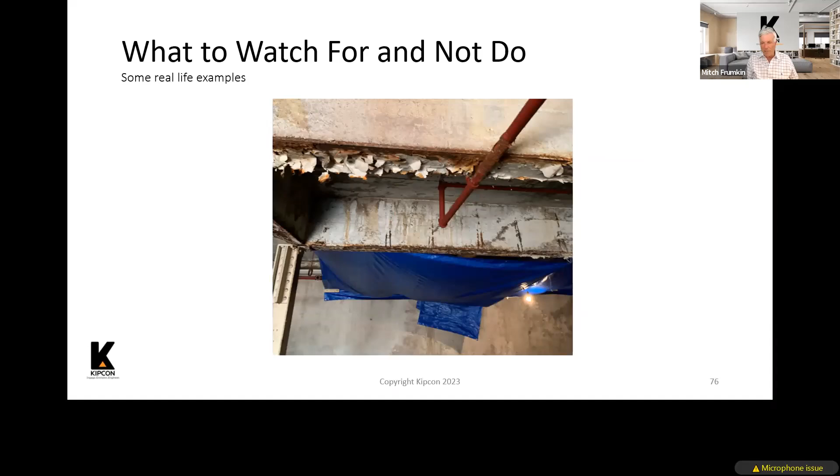Is this the same picture with the gutters and downspouts? If you start putting these things in, it's a problem. This netting was put in so that the ceiling of this parking garage didn't collapse. You can see the reinforcing steel, but fix it, don't cover it. And this is a parking garage we were working on where we walked in and there was a blue tarp to keep the water from dripping on the cars. As soon as we took the blue tarp away, we saw problems with the structure.

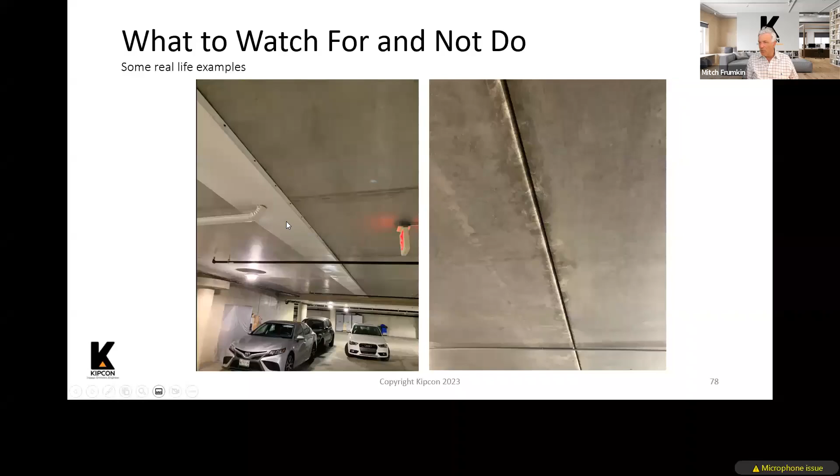Here's some other tarps that are in garages. This is a parking garage in Philadelphia where every joint is wide open, and you don't see any problems. But at this one, why did they put in a gutter and downspouts? You think there's water coming through? That's creating problems. Absolutely. This is one of my favorite pictures.

The association or somebody put in this to keep the water from getting on the cars. They put in this diverter, I'll call it, which now directs all the water to the steel beam that holds up the garage, and that's rusting away.

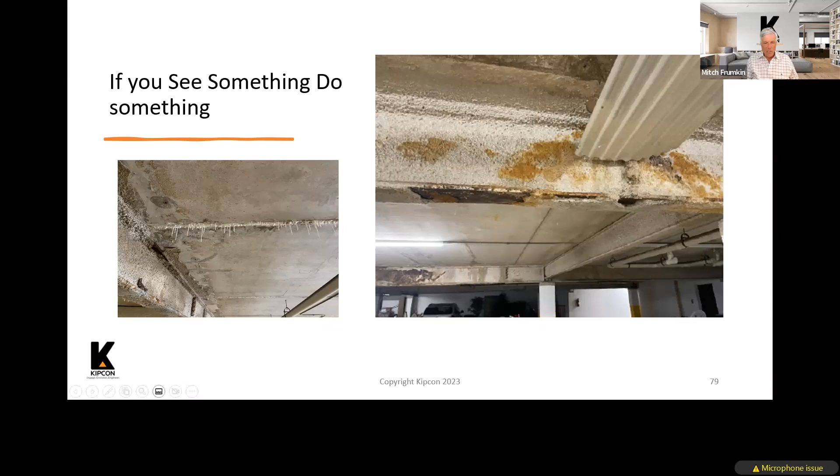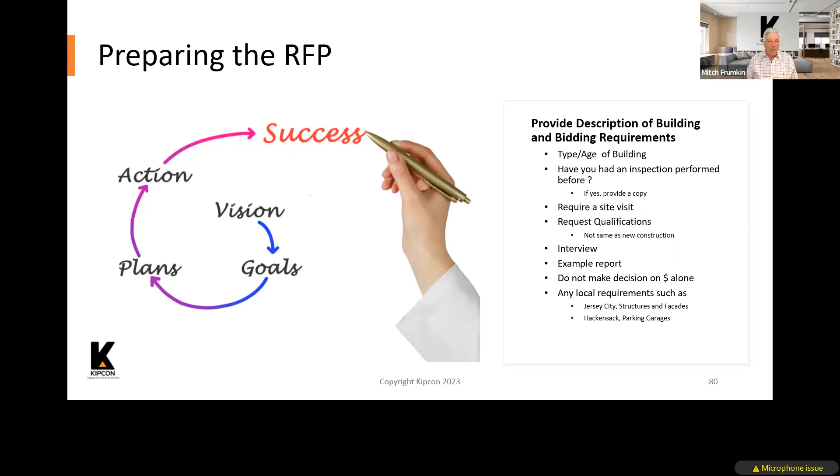And then if you're looking to prepare an RFP for having a structural inspection done, it should include type and age of building. Have you had any inspections performed before? And you should require a site visit. So we're going to send everybody a copy of this presentation, but it has some things you should look at when soliciting proposals for these types of inspections, including what the report requirements are.